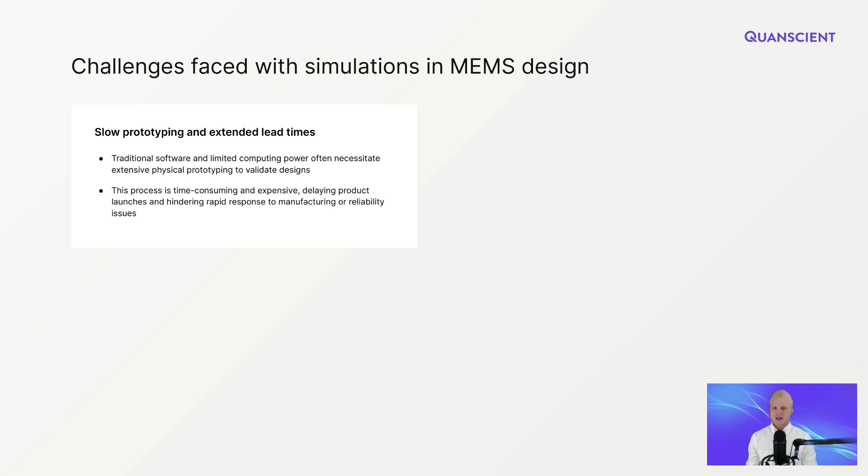The first and maybe the biggest of them is the need to rely heavily on physical prototypes to validate the designs. As everyone knows, each iteration is expensive and time-consuming, delaying product launches and hindering the response to any manufacturing or reliability issues in the device itself.

Next, as MEMS devices by definition involve interactions between multiple physical domains, traditional software can struggle to accurately simulate these complex multiphysics interactions, requiring either simplified models or separate simulations for each domain. This is again by and large due to the limitations in computing capacity and RAM, which can lead to inaccurate results and potential oversights in the design process.

Again, with restrictions on the number of licenses and limited computational power, engineers are forced to make design decisions without fully exploring all potential solutions. This can result in suboptimal designs that fail to maximize yield, reliability, or performance, which in turn can increase development costs and delay time to market.

Finally, traditional software may struggle to create accurate simulation meshes for the intricate details of MEMS devices. When the model's geometry is exceedingly complex, meshing simply becomes computationally too demanding, if not outright impossible. As a result, engineers have to either simplify the geometry or run multiple simulations on smaller parts and stitch the results together. The results, either way, are suboptimal and at worst lead to costly design iterations and delays to market.

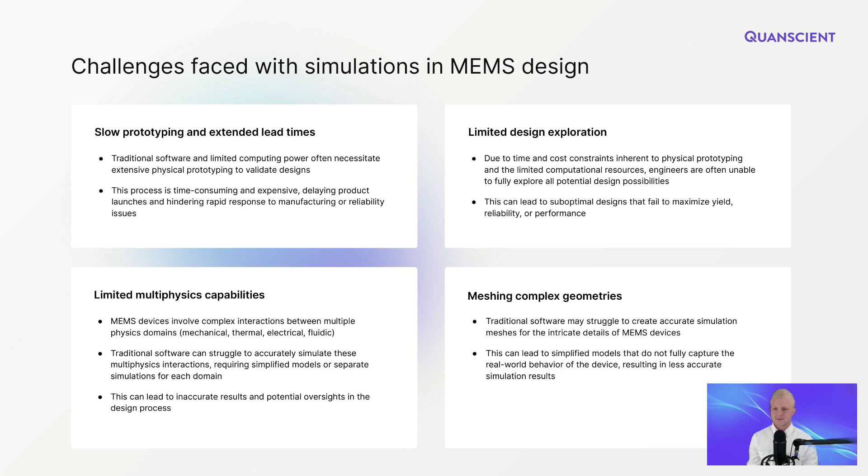Let's have a look. What cloud computing can allow in theory is next to unlimited computing power and RAM, with zero restrictions in terms of licenses. What this means in practice is that engineers can test and validate design variations with faster speed and increased accuracy, reducing the need for extensive physical prototyping. This simply enables shortened development timelines and faster time to market.

Now, with the increased computing power, the natively coupled multiphysics algorithms of Quanscient Allsolve enable accurate simulations of even the most complex multiphysics interactions in one single simulation. This eliminates the need for simplified models or separate simulations for each domain, resulting in a more comprehensive and reliable design validation.

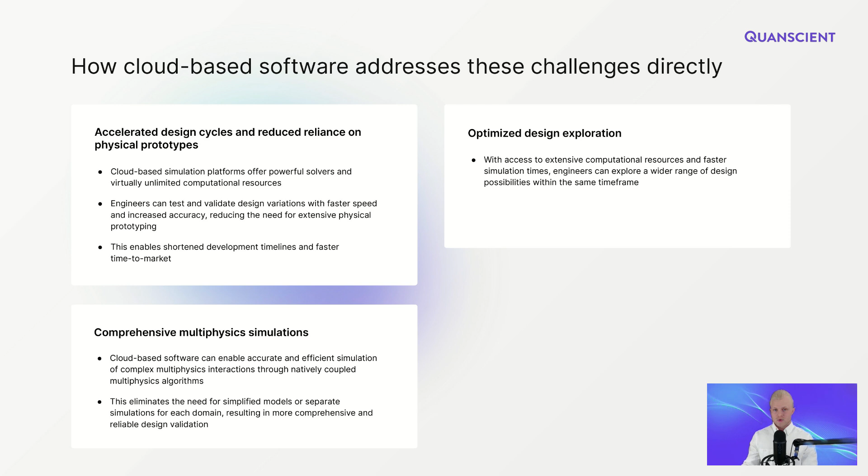Again, with access to extensive computational resources and faster simulation times, engineers can explore a wider range of design possibilities within the same time frame, allowing for a more thorough optimization process and eventually leading to designs that maximize yield, reliability, and performance. This concept of increased design exploration is actually something our live demonstrations will largely focus on.

So our guest speaker, Dr. Andrew Tweedy, will show how it actually works in real life application, how it looks, and what the results and business impact can really be.

Finally, creating accurate meshes doesn't have to be a bottleneck with cloud-based software. With the immense computing capabilities of the cloud, engineers can create larger, more accurate meshes that capture the full complexity of their designs.

Furthermore, the mesh extrusion feature allows generating a high quality mesh even on complex geometries with ease - let's say ease being in relative terms. As a result, engineers have greater confidence in their simulation results, as they are better able to capture the real world behavior of the device, leading to reduced development costs and a faster time to market down the line.

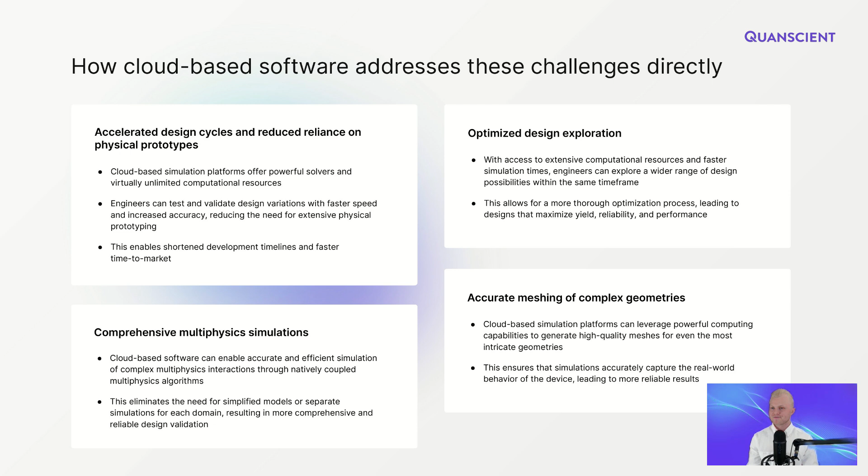Now, before getting started with the actual live demonstrations to see how a cloud-based simulation software looks like, let's very quickly blast through some of the other benefits of cloud-based simulation software and their business impact, as I know there will be a lot of interesting stuff for you guys here as well.

To begin, we sort of touched on this topic before, but indeed, at least with Quanscient, there are no user limits whatsoever within the platform. This means that any number of engineers, researchers, collaborators can access the platform and view the project, granted you have given the permission, of course.

The cloud-based nature also means that simulations can be set up and monitored from any device with a web browser, so there are pretty much no hardware requirements. Collaboration also becomes as easy as sharing a link, meaning that team members can work on simulations concurrently, review results, and provide feedback in real time.

Now, something our users like a lot is the Python scripting interface, which automatically generates Python scripts that fully define the simulation setup. This gives a lot of flexibility for our users, as we will see in today's demonstrations.

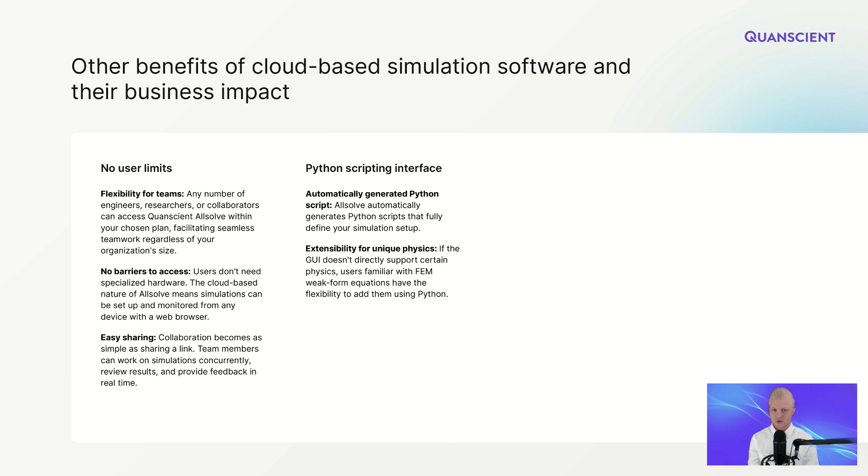Just one example mentioned here is the ability to add physics using Python that might not be supported in the GUI. Furthermore, the extensive multiphysics script libraries provide a valuable resource, offering pre-built simulation examples and templates.

Then we have the usage-based pricing, which basically means that the pricing is based on the usage rather than licenses, ensuring that you only pay for the computational resources you use. And on the flip side, when you aren't running any simulations, none of your quota is spent. This model enables organizations of all sizes to access these powerful simulation capabilities without any huge upfront costs, investments in hardware or software licenses.

And finally, we have our praised team of application engineers ready to help customers just a few clicks away in the GUI. In addition, all of our users have access to a comprehensive library of resources, including tutorial videos, documentations, and user guides to quickly learn the software and expand.

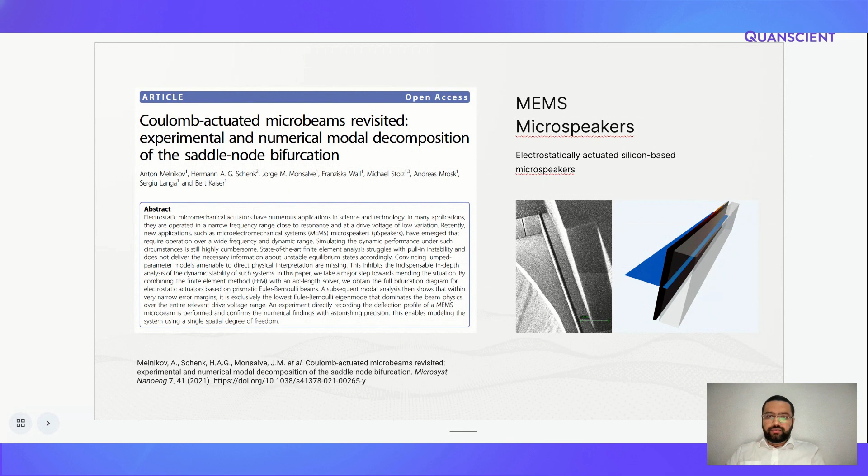In this webinar, we'll see how to set up the basic building block of these micro speakers. This is basically a micro beam clamped on both sides, near a fixed plate, and across these two plates a voltage will be applied. We'll see how to set this up in the platform, and also how to set up parametric sweeps to characterize the operation of these kinds of speakers.

Here is a schematic of the setup. In this case, symmetry is shown, but we will not use symmetry - we'll use the full beam. There's a fixed plate at the bottom and the beam at the top, separated by an air gap, operated by a voltage across them, which is usually a sinusoidal signal.

In this case, I'd like to highlight the non-linearities, which come mainly from the mechanical motion - the motion of this beam, which needs mesh deformation and so on - and the electrostatic force, which scales as the square of the voltage. Since the voltage is usually sinusoidal, if we do some trigonometry, you can see that ultimately the force acting on this beam would be cosinusoidal, but operating at twice the frequency of the voltage.

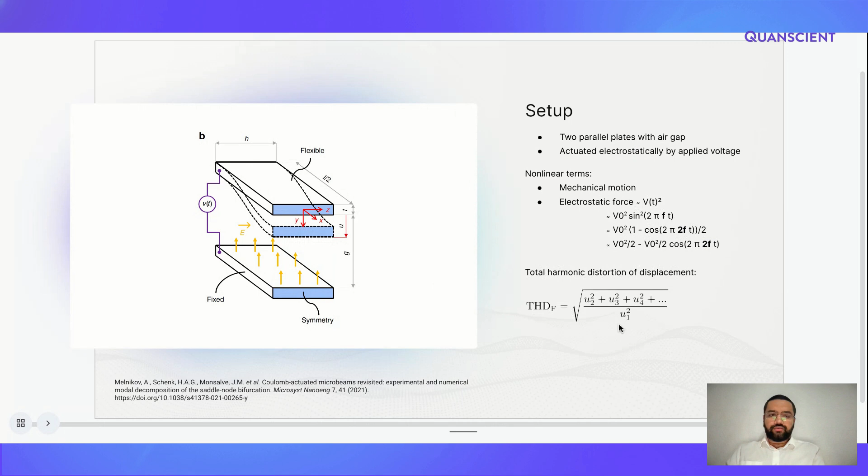Let's jump back directly to the demo.

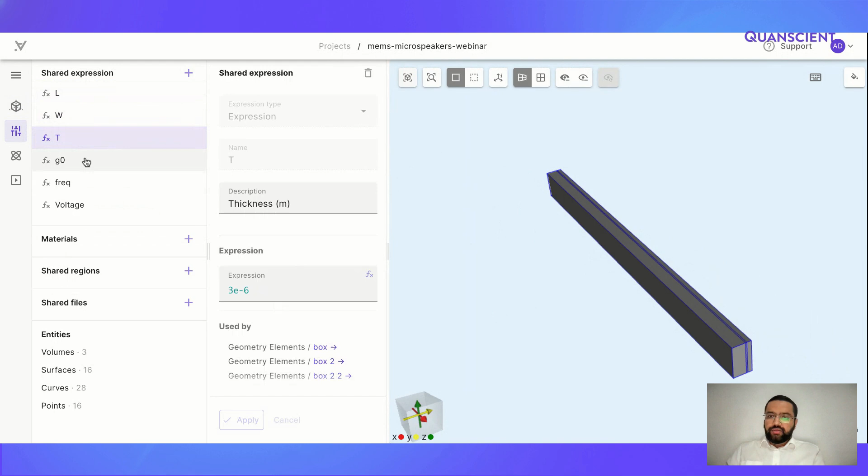To save some time, I already built up some geometry - a much simpler geometry, basically three boxes. I've used shared expressions to parameterize the geometry: the length, about 1000 micrometers, width, and thickness, and the gap between the plates, which I didn't model here on this side because it's basically fixed and there would be no interesting physics to model there.

So here is the beam, the microbeam, at the center. On the right hand side is the air gap. On the other side is the free ambient domain.

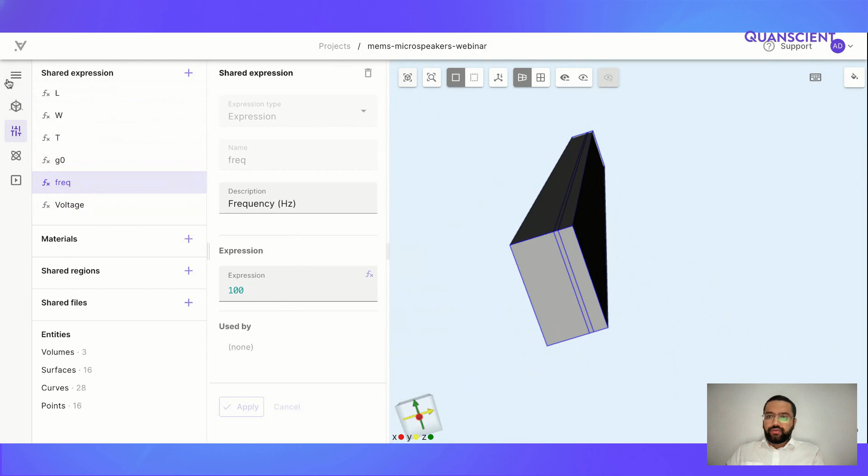I also have two shared expressions which we'll use later for the parametric sweeps. To build the geometry, I use these shared expressions so that I can change them later and get a new geometry, basically to do geometric sweeps. This is not the only option - you can also import your own step file, or directly import the mesh if you have it in a certain format.

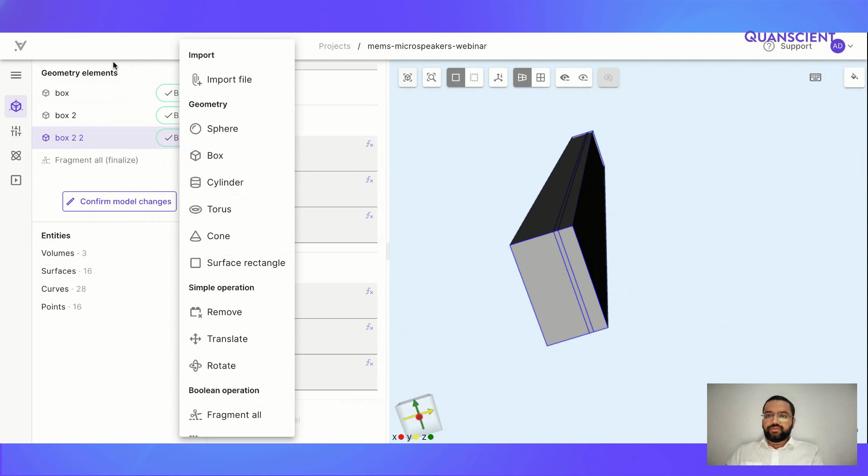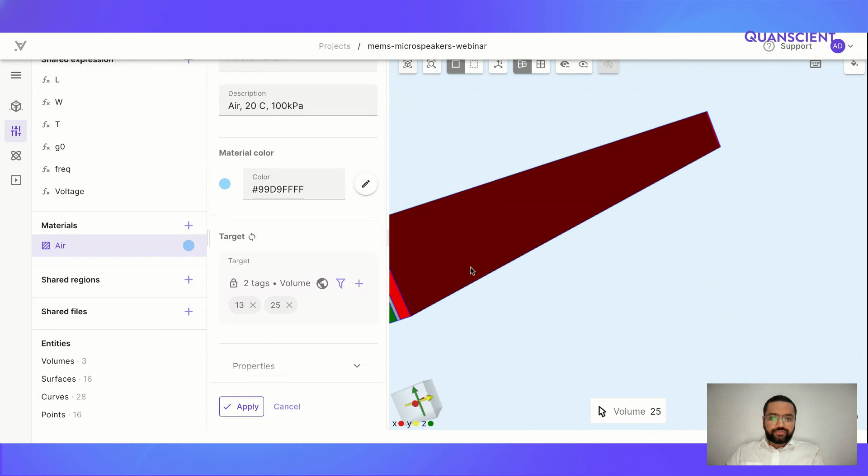With that, let's move on to the regular workflow for any simulation software: setting up properties, then physics and simulation. Let's set up some material properties, choosing air for the air domain - in this case we have two volumes consisting of air. Then for the microbeam, I chose monocrystalline silicon, a pre-built material in our materials library, but you can also define your own material if needed.

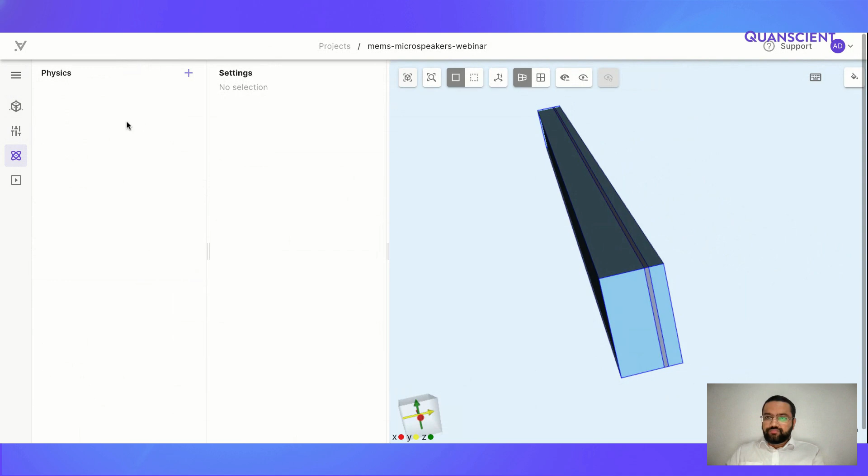Once we've defined the materials, let's go to the physics. We have a list of physics that can be used. For this case, we'll need solid mechanics, electrostatics for actuation, laminar flow for the fluid flow, and mesh deformation to take care of the deforming boundaries here.

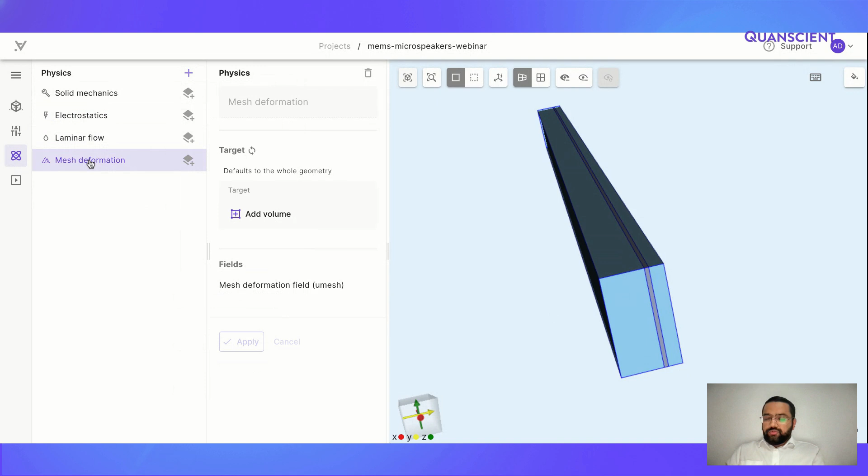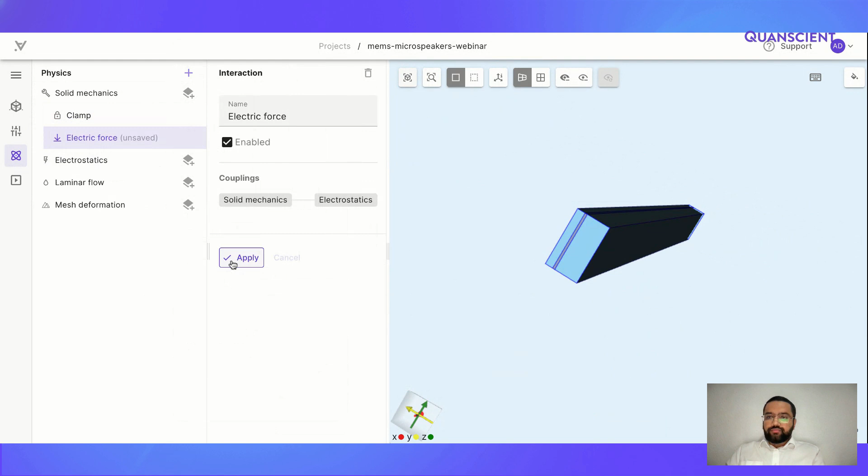Once we have all the physics added, let's start adding the boundary conditions. For solid mechanics, we have to clamp the beam from both sides - let's clamp this end and the other end. Then we have to add the electrostatic force on the beam; you'll see that once we add this, it also appears in the electrostatics physics. Lastly, large displacement to take care of the geometric nonlinearities that might appear in the beam.

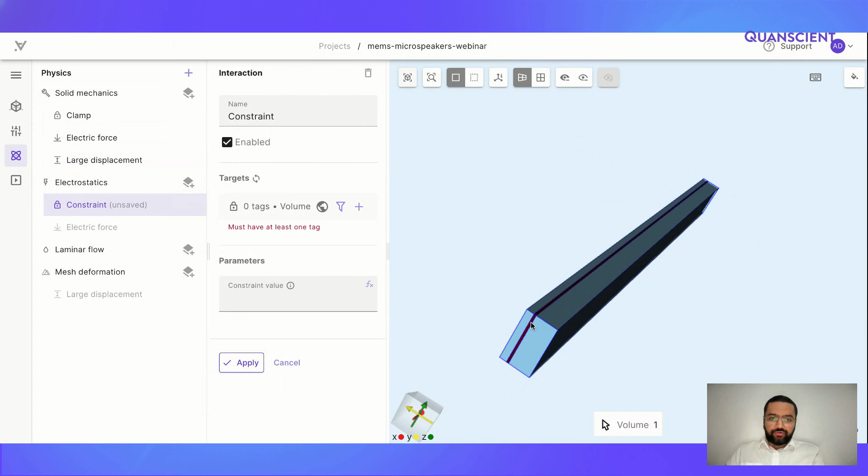On the electrostatics, we have to add constraints, so let's add the electrode. The beam acts as the electrode with some sinusoidal voltage - sine of 2 times pi times, as I said, using half the fundamental frequency.

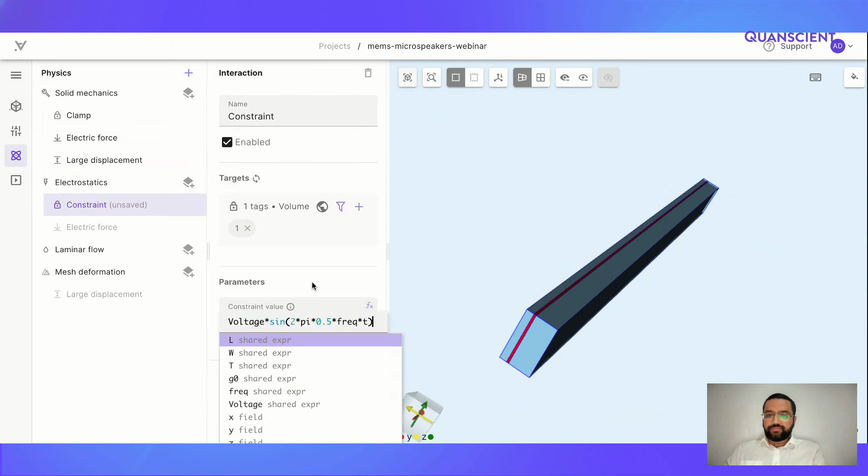As you can see, we already get these shared expressions in the drop down box here to use as an expression for our boundary conditions. And on the other end, we have this surface which will set the voltage to 0.

Again, the electrostatic force is also nonlinear due to displacement, so we have to add the large displacement interaction here.

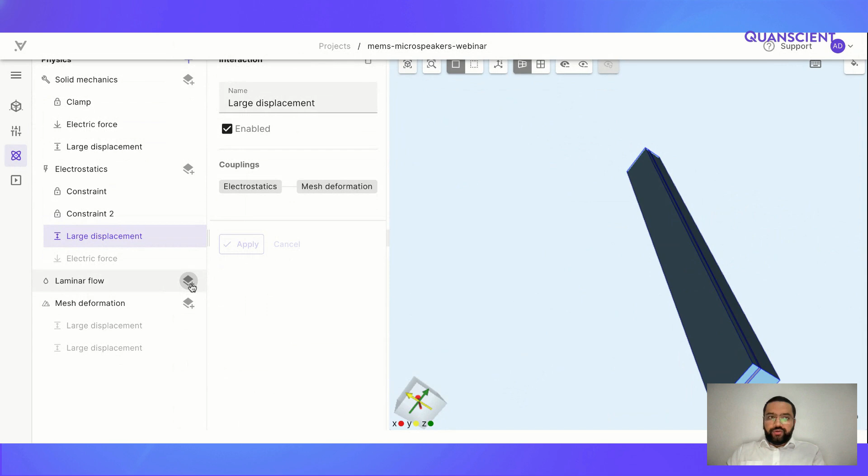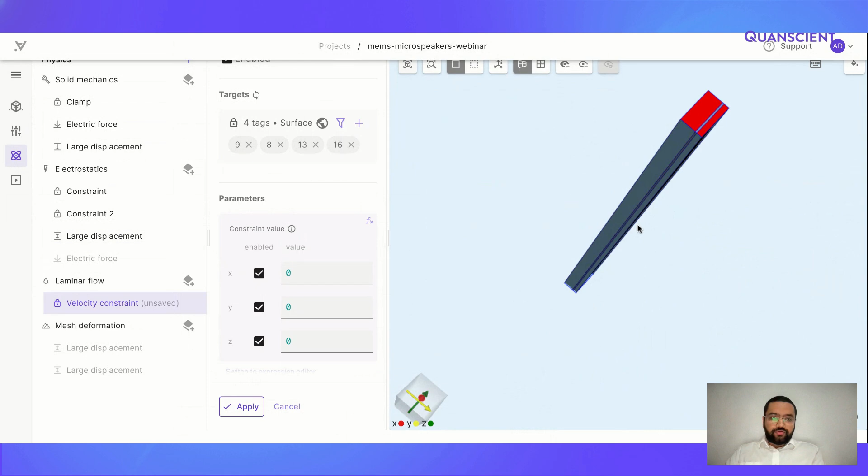Moving on to laminar flow, first let's set up the no slip boundaries where the velocity will be basically 0. These are the walls of the beam, walls at this fixed plate, then the ends, also on this side and the bottom, and on the other end. So these are the no slip boundaries that we have.

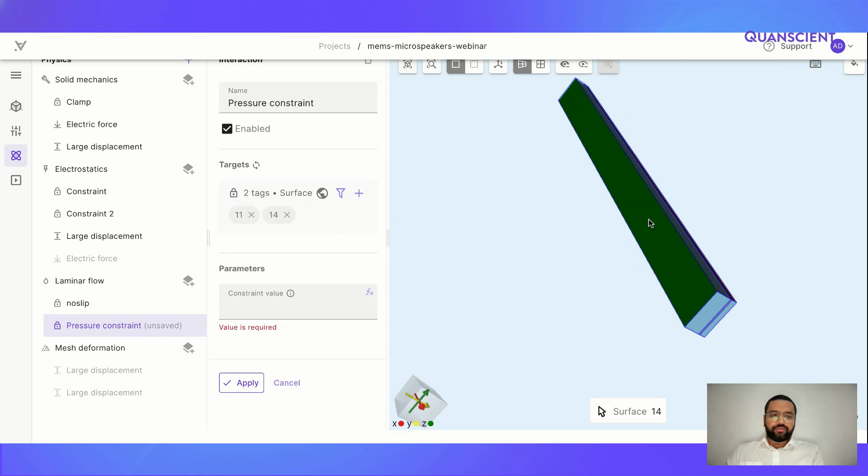As we are simulating the incompressible flow, we need to define the pressure at the outlet. So the outlets would be one here and the other on the end. So that's the boundary conditions for the fluid flow.

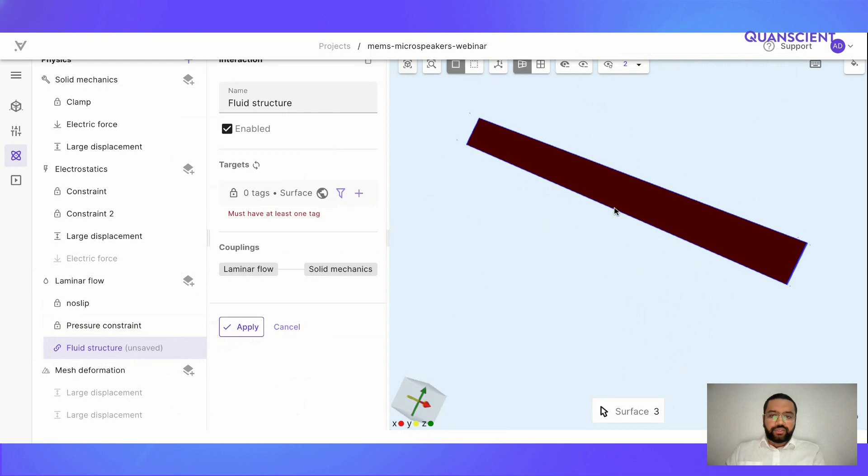We have to add one more interaction between this solid mechanics and fluid, which is fluid structure interaction. And for this, we have to define the surfaces which act as the fluid structure interaction. These are mainly the surfaces of the microbeam on both sides.

Again, for these regions where mesh deformation occurs, we have to take care of the large displacement, so the mesh deformation there as well.

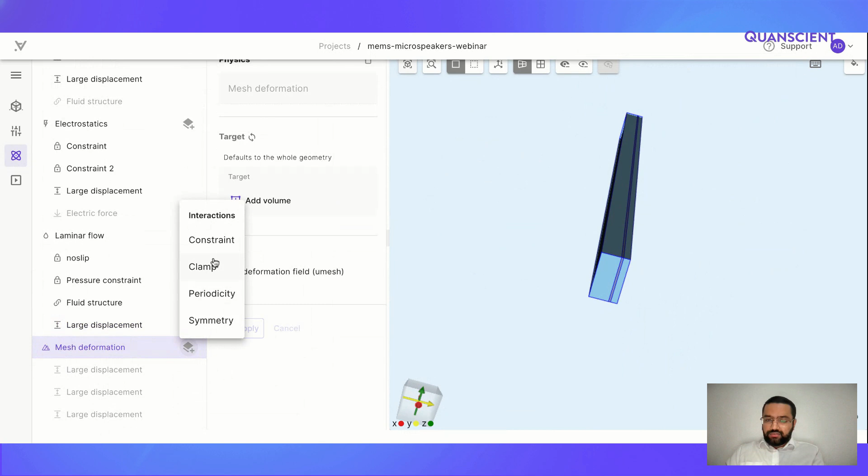Once we have defined the physics, we have to also constrain this mesh deformation. So we want to follow the mesh on the solid volumes, so there should be no relative motion between the beam and the mesh.

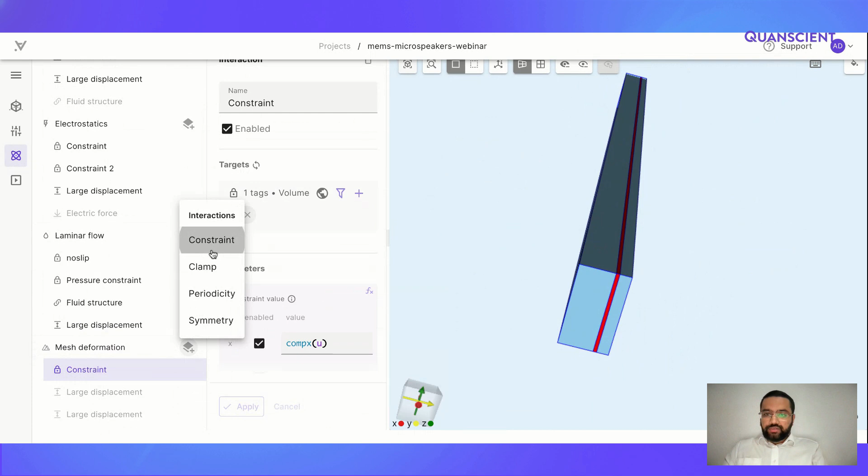So this should be component of x of displacement, component of y of displacement again, and component z of displacement. And one more constraint to fix the outer boundaries, mainly these surfaces which are fixed and should not move with the mesh motion.

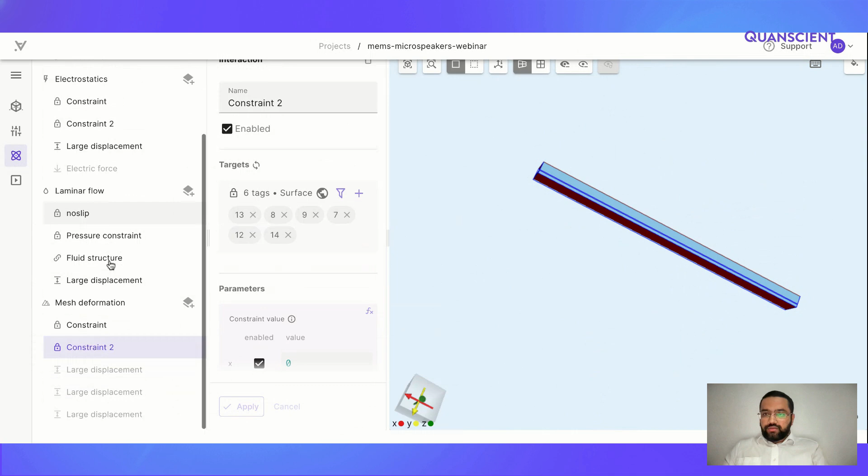All right, so that's all we have to set, and we can move on to setting the simulations.

For this example, I already have a pre-created mesh. Here I use the structured meshing because of the relatively simple geometry. It's very simple to set up.

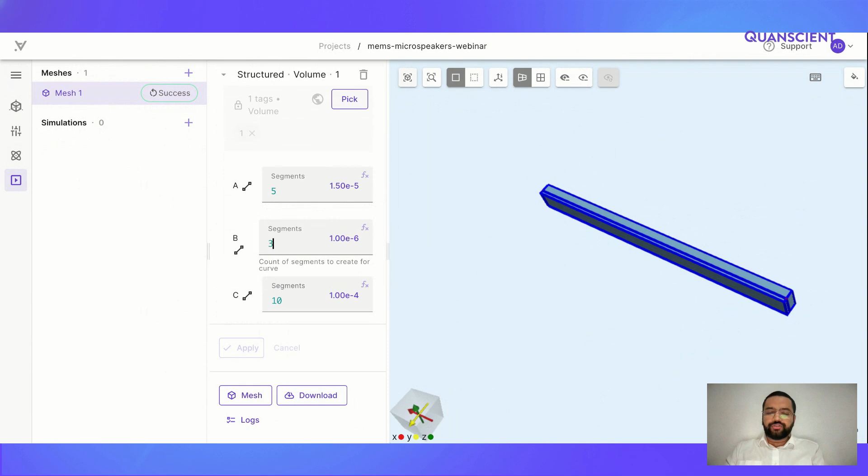For each volume, you can choose three sides which should be divided into different numbers of segments, and these are matched for each volume so that the common sides or common edges have the same number of elements. With this approach you end up with the structured mesh as shown here.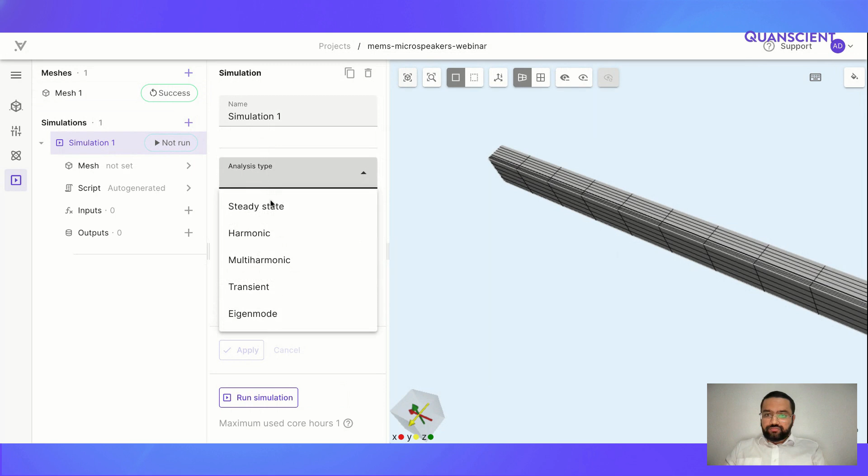With that we can move on to simulation settings. Let's add one simulation, choose multi-harmonic for nonlinear problems, then fundamental frequency, which is available as a shared expression. In this case I use 4 harmonics.

So in all, we solve for these 2 and 3 sine and cosine terms, so each of these pairs is one harmonic. Harmonic 1 is the constant part, 2 and 3 is the harmonic at the fundamental frequency, 4 and 5 at twice the fundamental, and so on.

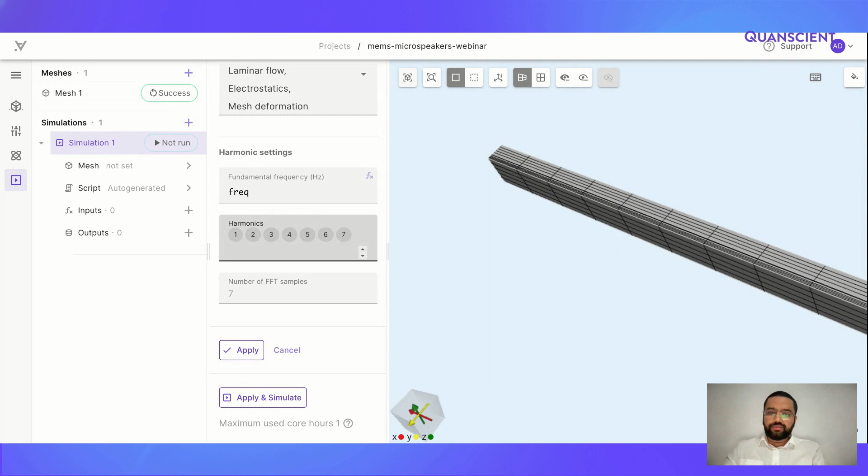So in this case I use four harmonics and a sufficient number of FFT samples for accurate representation of these waves. For this case, I know the degrees of freedom is going to be about 400,000.

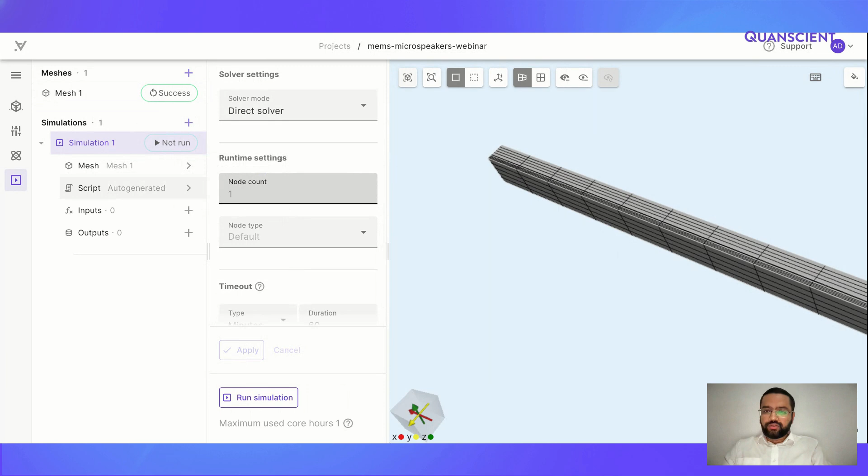So I will use about 10 nodes of 16 gigabytes of memory each. We have several nodes here that can be chosen for the simulation, and we automatically get the settings.

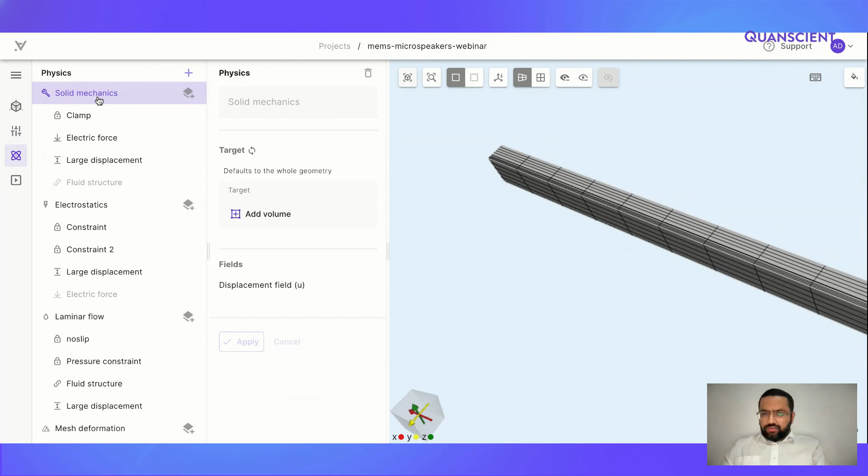I think I forgot to set the volumes here, so let's go back here to preview. Yeah, I need to refresh a bit.

We had to define the solid mechanics region for each of these, otherwise the default is the whole geometry. I defined the interactions but failed to define the regions.

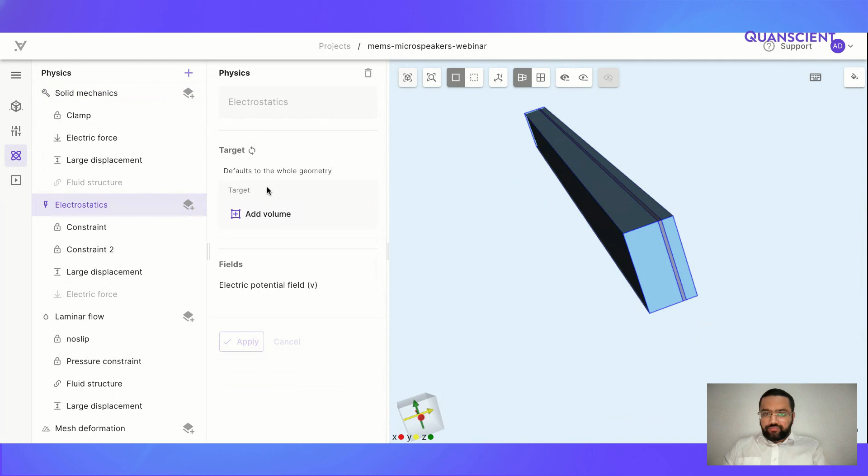For electrostatics we have to choose all of the regions so that it's covering everything. Then the laminar flow is restricted to two volumes, and mesh deformation applies to all volumes.

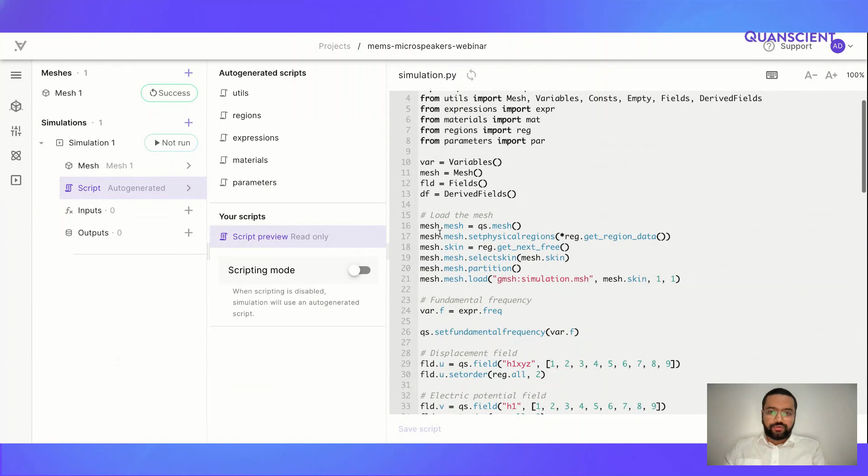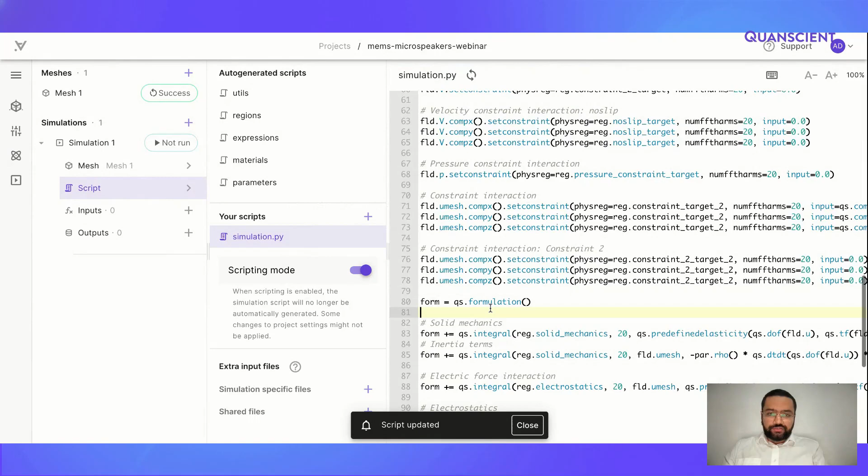Once we have done that, we get the auto generated Python script where we have several blocks of code for the mesh loading, definition of fields, then definition of boundary conditions or interactions. And here is what Yuka said before about the formulation.

So if you would like to add your own models, it's quite easy to do that using these formulations, which are basically the integral weak form of your finite element model.

As you can see as an example here, it's as simple as adding these expressions as you see them in your paper or your derivation. And lastly, the call—this block is for formulations for different physics and their interaction, and lastly this all-solve is the call for solution.

For post processing, here we can add our own post processing script, which is based on Python. I have already added this for saving time—I basically copied this from the pre-run simulation. So I can explain briefly.

This is the probe. At this location on the geometry, we are calculating or interpolating the y component of displacement field, and we are interpolating each harmonic. So in this case for 4 harmonics we have 8 components, which is what I am adding to this list.

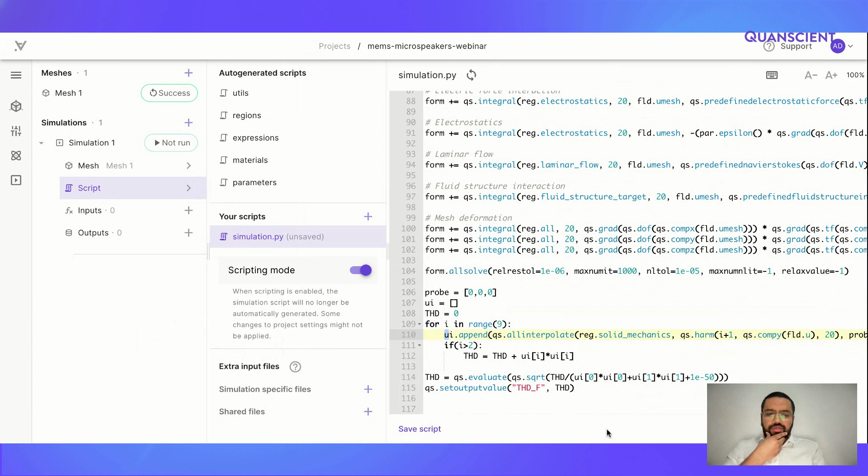To calculate the total harmonic distortion, I have to skip the first harmonic and add up the rest together. At the end, I am just dividing the sum by the first harmonic and taking the square root. To get this as an output, we have this function set output value, which will then appear as the single value for each of the parameter sweep in the summary.

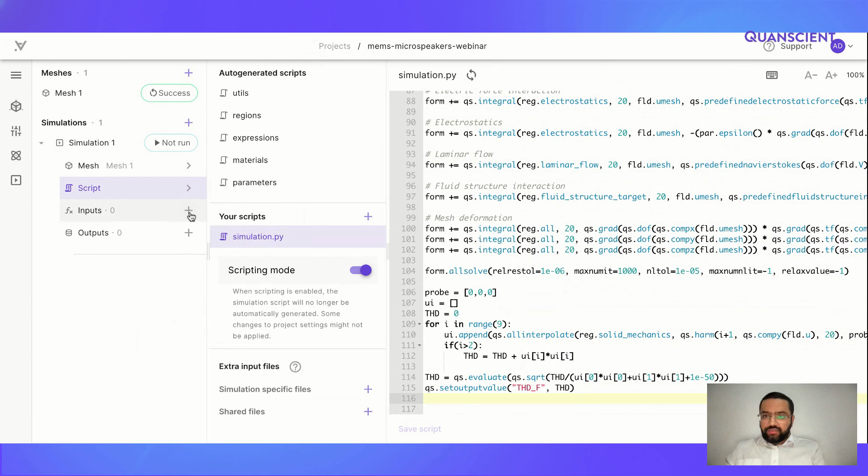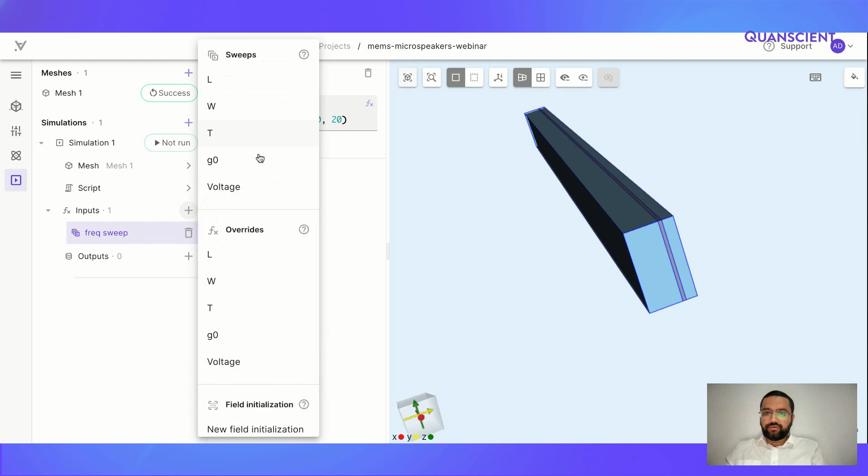The interesting part here is how to set up the parametric sweeps. We have inputs, and you can simply choose the parameter which you would like to use for sweep. For this, I will choose the frequency range from 20 hertz to 20,000 hertz in 20 steps, and also a voltage sweep, going from 1 to 20 in steps of 20. That's all you have to do for setting up parametric sweep.

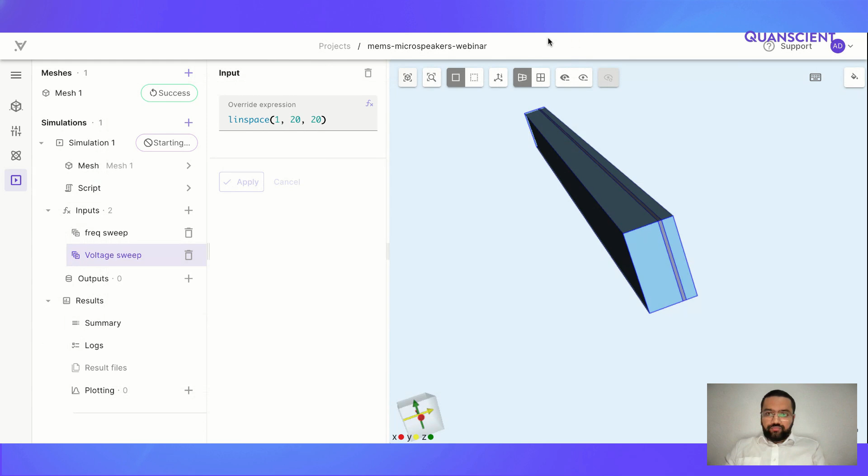Then you can already start this simulation, and once these simulations are finished, you will be able to see the summary here. It takes a short time to start these jobs, so meanwhile we can already take a look at the sweep job I ran before. This was exactly set up in the same way—20 simulations, frequency and voltage sweep.

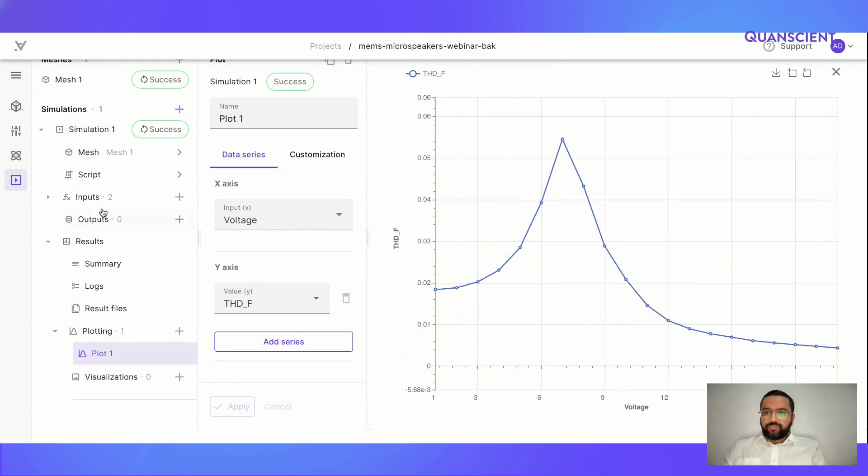As I said, in the summary you can get these value outputs, which you can easily plot as a function of frequency or voltage. And this is not just it—when I already ran a bunch of simulations before, I did the parametric sweep separately for frequencies and voltage.

So that's all from my side, and I would like to hand over to Yuka for more interesting stuff from our guest speaker later.

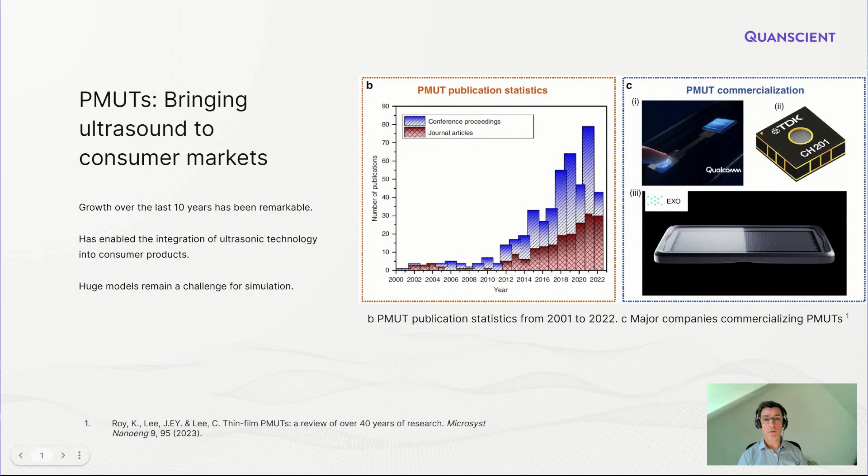These are large, typically transient models requiring sometimes tens, sometimes hundreds of millions of degrees of freedom. And it's not a challenge that can easily be handled in every simulation package out there.

So what makes them so complex? Well, each sensor in one of these large sensor arrays has quite a complex microstructure with a number of thin layers, sometimes quite detailed interconnects that can be important to capture. And the array itself can comprise potentially thousands of elements.

On top of that, there's quite often a large load region in front of the array that can be very important to simulate. So you've got this very large but very detailed sensor coupled to an elastic or acoustic wave propagation region. And there's not a lot of solvers that can handle that all in one simulation.

As I mentioned, these are very broadband devices, so it's typically a transient analysis that we want to carry out, and that means solving these tens or hundreds of millions degree of freedom models hundreds or maybe thousands of times.

And multiphysics is essential. These are piezoelectric devices. I mentioned the elastic wave propagation. We've got electrostatics. A lot of the multiphysics that you saw Abhishek setting up a moment ago.

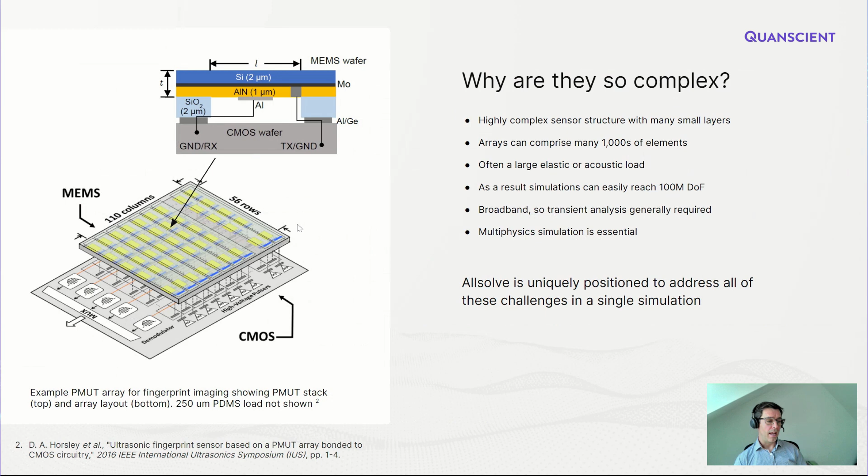And to demonstrate some of the work that we've been doing, we've picked this PMUT fingerprint array example from David Horsley's group at BSAC. A few details here, but it serves as a nice base example to show off some of the things that we do without getting into customer-specific details.

So at Cogsys, we like to start with the simplest model possible. The reason we like that is it captures often a lot of the physics and the outputs that we're interested in. But if you can start simple, you can iterate quickly.

You can run the sort of design sweeps that Abhishek just showed us. And you can do some other things like the example that we're going to talk about today, which is Monte Carlo analysis. So it's good to have that base model set up.

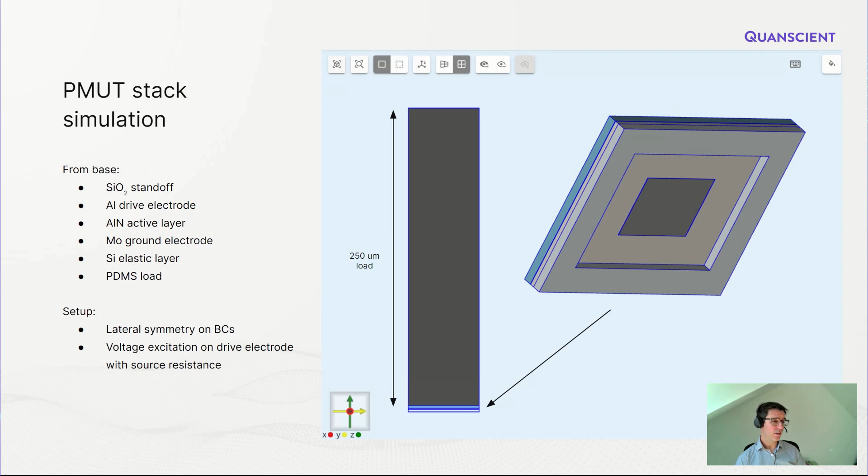This is the rectangular PMUT elements that were detailed in the diagram we just saw, and when we run that simulation, we get really a whole host of outputs, the sort of things that we would typically measure in practice when we're evaluating these devices.

So on the left, we've got a velocity field, and on the right, we've got electrical measurements of voltage and current on the electrode.

That lets us get really the base performance of this device before we go on to look at more complex effects. And the good thing is that despite being a non-trivial model, it's just under 400,000 degrees of freedom. There's a lot of packages that would require some quite serious simulation time. We can run this simulation in 4 minutes, which really allows us to iterate very quickly on a new design.

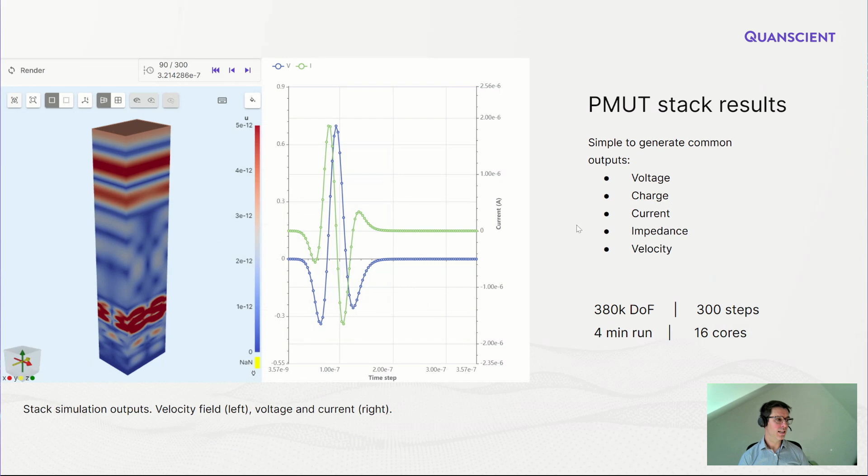So that gives us a good starting point, but to really start to develop a fingerprint imaging array that would perform well in practice, we need to start looking at the array structure and ultimately the inter-element crosstalk, the beam shape, and ultimately the beam forming performance.

So this example shows an 11 by 11 section of one of these large arrays. It's been built entirely in the AllSolve UI that you just saw Abhishek using, a similar process to what he just demonstrated. And we can use that to do a few things.

The first thing I want to show here is a simple simulation where we just excite a single element. So we've excited that center element here with a short pulse. And what we can do is observe the crosstalk mechanically propagating out along the surface of the array.

I should point out here that we're looking at the array surface in this plot, but the load medium, in this case a 250 micron region of PDMS, which is quite a light polymer, is still present in the simulation.

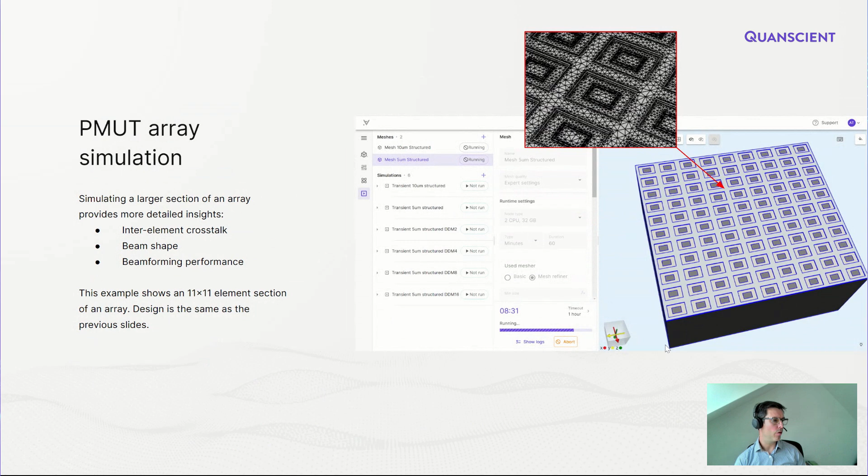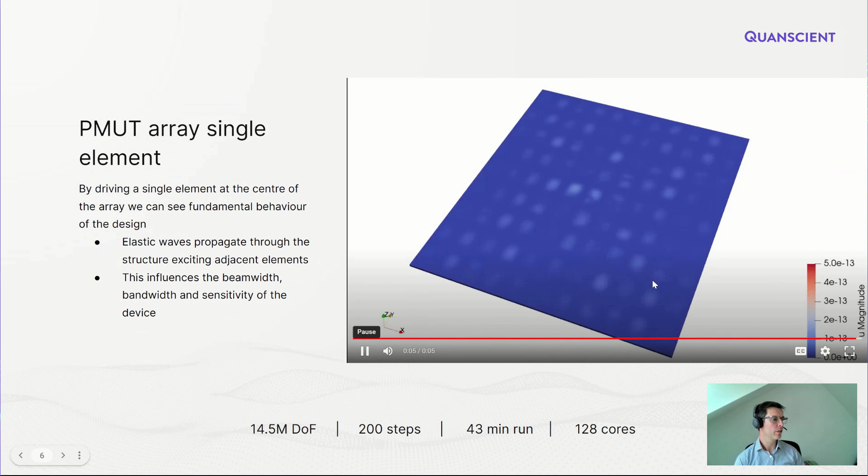So in this model, we have that full structure here, and we can see that there is indeed quite tangible crosstalk across the array surface. Now, this is going to affect the imaging performance of the device. It's going to limit beam width.

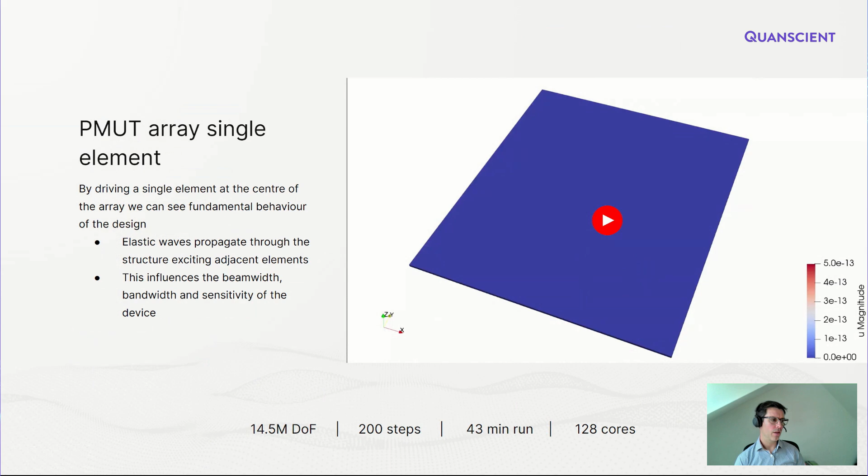A useful thing to point out at this stage is that this is a much larger model than the one we saw on the last slide. This is 15 million degrees of freedom, just under, over 200 time steps, but we can still evaluate this in under an hour. So it lets us evaluate quite realistic beamforming scenarios where we need to drive the array with multiple different focal laws in really feasible timescales.

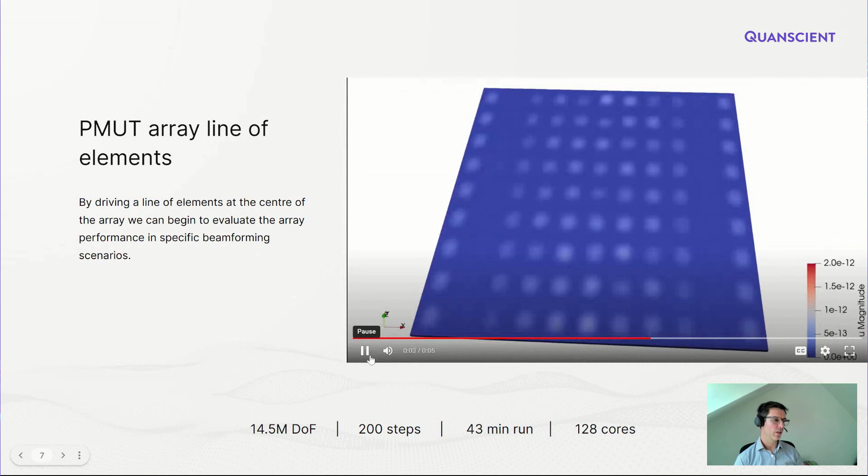Here's another example using the same model, but with just different drive conditions. This time we've set it up in a more realistic manner for a fingerprint sensing application where we're exciting a column of elements and we're observing the crosstalk across the surface. And again, this starts to get us to the imaging performance that we would be able to see from this stack.

This will affect our receive beamforming capabilities. So it's important to be able to quantify this if we're going to design an effective fingerprint sensor.

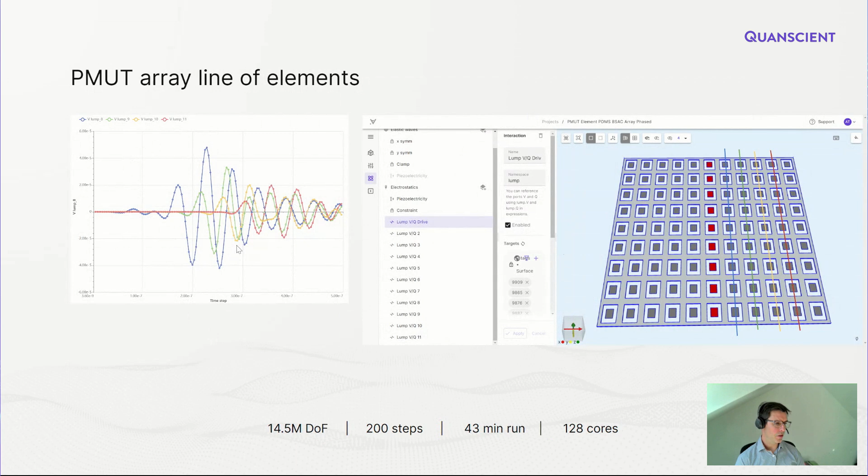So the idea there was to show off some of the things that we do in terms of fingerprint array design and how we would use AllSolve to simulate beamforming performance. But there's another thing that we have started to use simulation for, which is probably more novel, which is looking at the manufacturability of devices.

So the next few slides talk about Monte Carlo analysis for PMUT devices. So the question is, why would you do this? Well, as we know, manufacturing processes are all subject to variability, and indeed the materials that we use in those processes vary in properties too. So the performance of any real world device is going to differ from its theoretical simulated performance.

And Monte Carlo analysis allows us to simulate this effect and ultimately simulate the effect it will have on the performance of a batch of devices that we build, and ultimately start to give us an idea of what our yield could be. And it's a pretty well-known quote that in manufacturing, yield is money. So there's a lot of device manufacturers very interested in bringing simulation into their manufacturing engineering departments, where it hasn't really existed in the past.

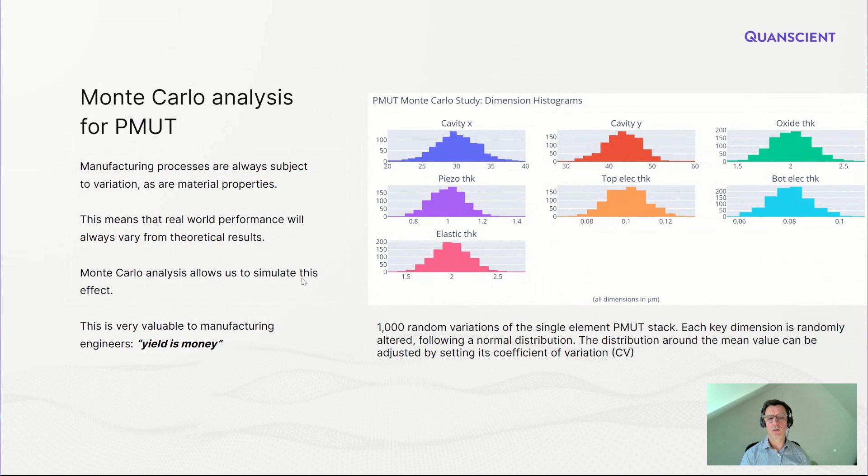We've set these up by specifying a mean value and then some sort of coefficient of variation around that. And the idea is that this could be matched to the tolerances that we see in our actual manufacturing. And what we want to know is ultimately how will this affect the yield of our manufacturing process. So we can use simulation to do that.

Now, just as an aside, to set this up, we've used the Python scripting features that Abhishek mentioned. I find this a really powerful thing where you can use the UI to set up a model in the first instance, but then if I need to add other things or customize outputs and metrics, I can go and edit that script. So I'll skim over this because Abhishek's covered it in some detail. But specifically what we've done here is we've used it to set up those random dimensions.

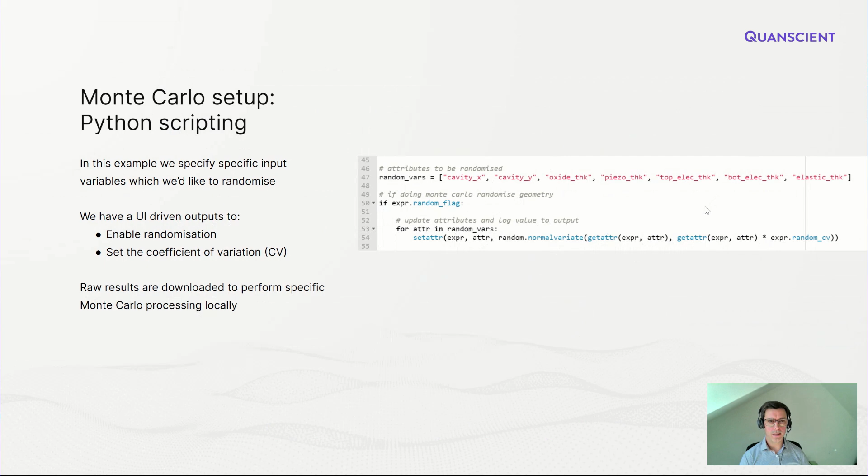So we've got a line here that goes through the various dimensions we're interested in and randomizes them using a normal distribution. What's really nice is that we can set this up once and drive it from the design variables that you saw Abhishek setting up. So once this is set up from scripting, we can then use the UI to drive it at a high level.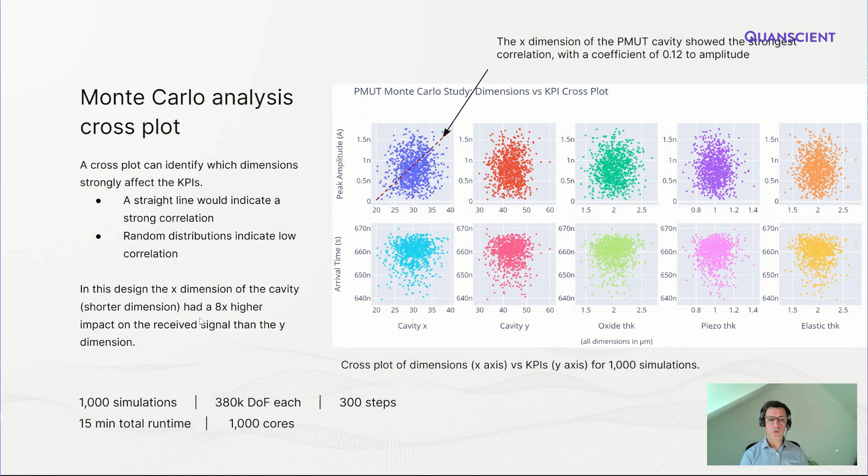I think really the final thing to highlight from this slide is we ran those 1,000 simulations with 300 time steps each in 15 minutes total runtime. So that again speaks to the capability of the cloud here to accelerate these sort of analyses.

So these are the sorts of metrics that for manufacturing engineers are very valuable. Increasing that by even a few percent could mean a lot of value, consistency, ultimately profit. So we see this as a big next step in bringing simulations into the field of manufacturing.

So with that, I'll wrap up and pass back to Yuka.

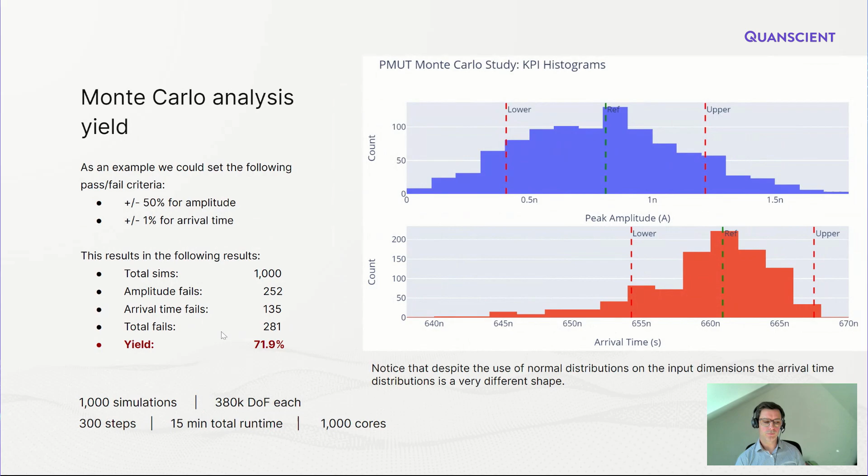So the first question for you, Andrew, is from the user perspective, how do you feel about the security of a cloud-based platform?

I think these days when I use cloud for my personal banking and finances, and indeed in Cogsis we use accounting tools that are cloud-based, we store lots of our data on cloud storage. I don't see it as an issue, and I see the huge benefits we just talked about in terms of design insights and manufacturing insights as a real motivation to go in that direction. So it doesn't cause us any issues.

Fair enough. Now, another question for you was about the usability, especially getting started. So, how easy was it to get started with Allsolve?

Look, I'm fortunate that I've worked in this field for a long time. Just speaking for myself, I found it very intuitive. To go back to the point I made earlier, the ability to use the UI to set up an initial model and then to be able to see the underlying structure of that in the code, and make any changes going forward, is hugely beneficial, but also a really useful learning tool for me. So I found the learning curve not so steep compared to other tools that I've used.

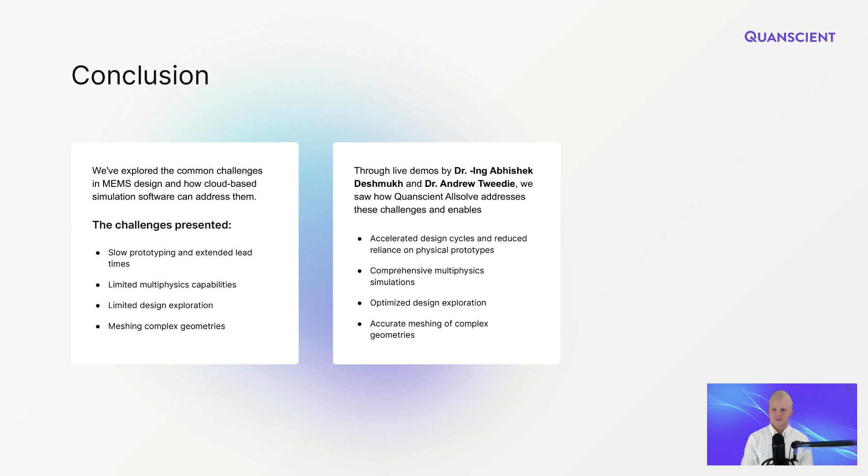Now, as key takeaways, I would summarize that based on what we saw here today, Quanscient enables faster design cycles through faster iterations and increased innovation through the ability to explore a wider range of design possibilities. These would be the big ones we covered in detail. The others, while perhaps less groundbreaking, are still definitely nice to haves: improved collaboration through the unlimited number of licenses and the nature of the cloud-based platform, reduced onboarding time and increased productivity through the intuitive interface and ease of use, and finally cost savings by eliminating the need for expensive hardware and software licenses, reducing upfront costs and ongoing maintenance expenses.

So there we have it. The goal of this webinar was to see how engineers are leveraging cloud computing for faster design cycles and increased product reliability in MEMS design, and I think we have achieved that.